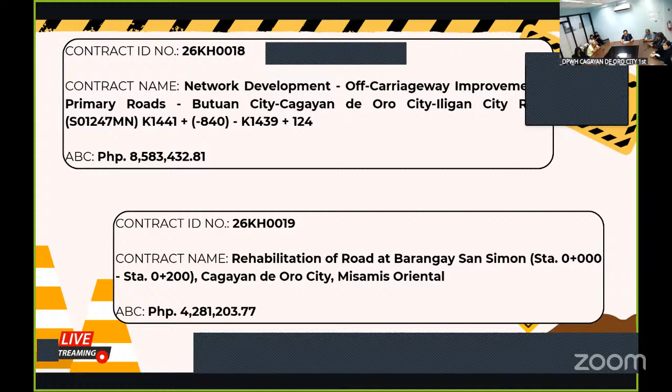Second project, we have 26KH0019. This is the rehabilitation of road at Barangay San Simon, Cagayan de Oro City, with an approved budget for contract of 4,281,203 pesos and 77 centavos.

Third project, 26KH0020, with contract name rehabilitation of road at Barangay Tagpangi, Cagayan de Oro City, Misamis Oriental, with an approved budget for contract of 4,381,792 pesos and 90 centavos.

And the last one is 26KH0021, with the contract name rehabilitation of road at Barangay Tignapoloan, Cagayan de Oro City, Misamis Oriental, with an approved budget for contract of 4,289,341 pesos and 56 centavos.

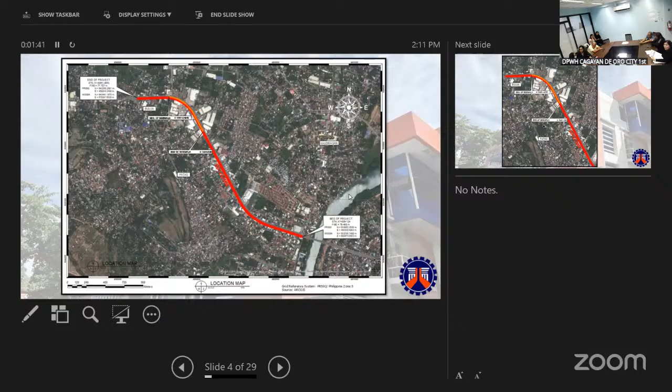So this is the whole stretch of the CIR, the orange part. So we can see the beginning of the sidewalk, the location of our project, and the end, also indicated in the image.

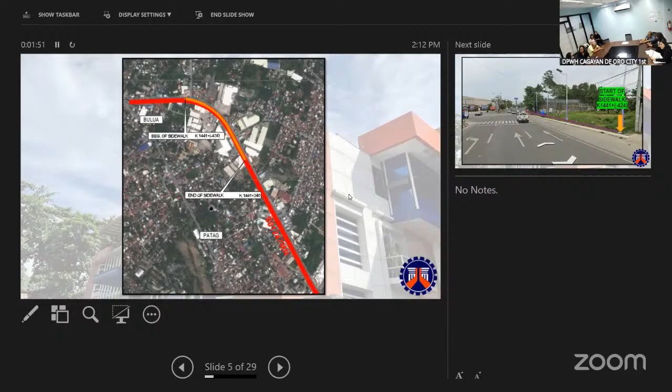So the start of our project will be located at the crossing to Butuan Terminal. As stated in the image, the start of our sidewalk is at K 1441 plus minus 424.

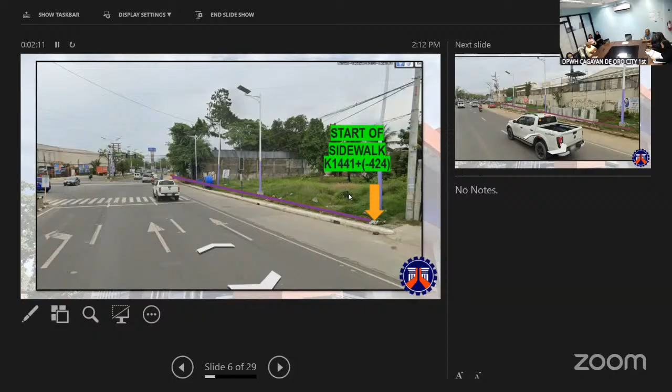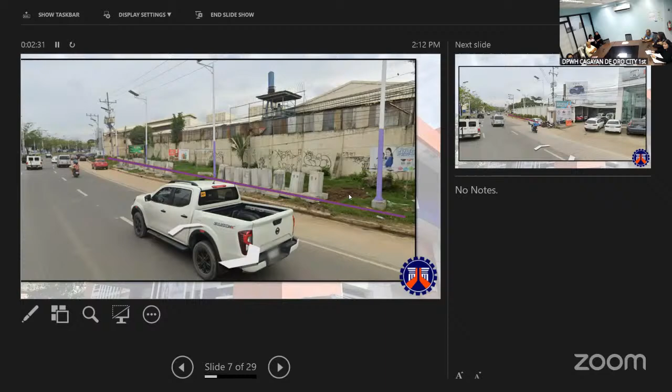So we'll follow along the right side, the sidewalk area, so we'll develop this. We will remove the existing curb and replace it to improve the sidewalk, and follow along. So here we will provide a transition in between the commercial areas or around.

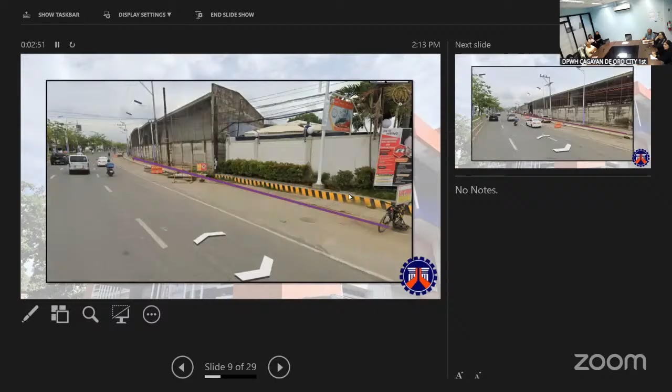Continuing from the RTM, from the Honda to RTMI, to the Gaisano warehouse until the quick drive area. The end of our project is at K1441 plus 240.

Based on the plan, we'll remove the actual structures and obstructions like the existing curb, and replace it with a concrete curb plus complete paving blocks, 0.10 meter by 0.2 by 60mm interlocking complete paver blocks to improve our sidewalk.

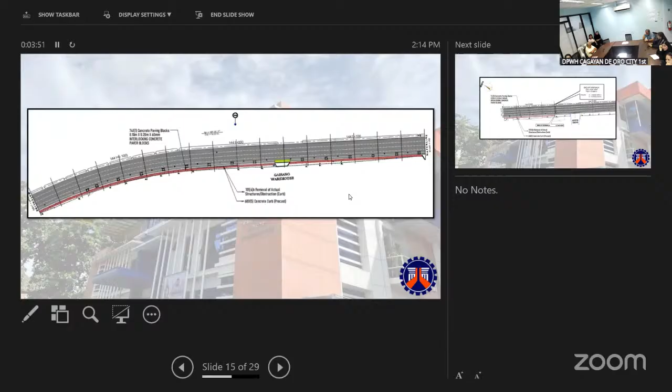The red indicated areas are the sidewalk areas. The void spaces are the commercial areas, which are the entrance to RTMI and also the entrance to the Gaisano warehouse. Continuing, we can see the end of our sidewalk at K1441 plus 240, near the quick drive crossing.

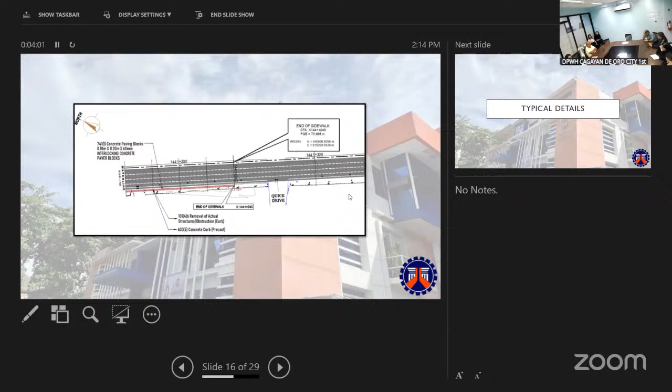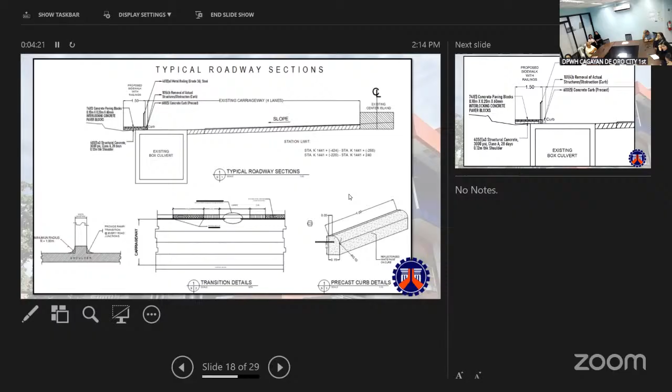For the typical details of our project, we have an existing box culvert. Our sidewalk will lay above it, so we will only develop the sidewalk. We can see here the details.

We remove the existing curb and replace it with a new concrete curb. We will have a metal railing, details to be shown later, and also structural concrete.

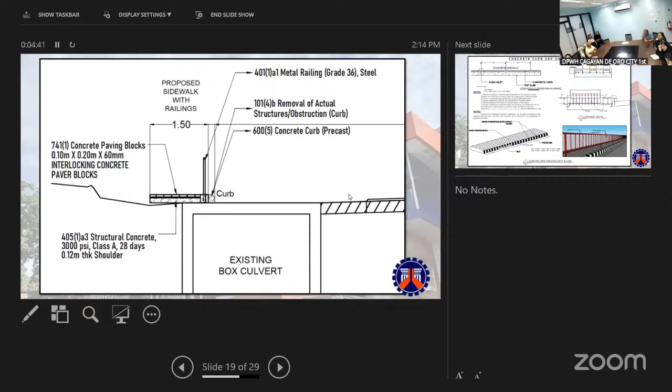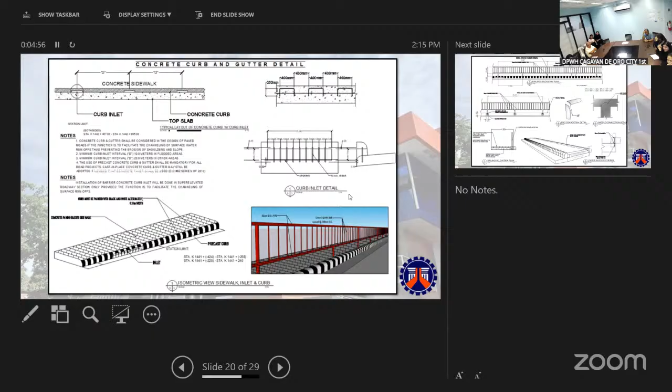So if we view the details of our curbs and sidewalk, here are the details of our railing elevation plans and also the end connection of our railings. The vertical poles of our railings will be spaced at 5 meters.

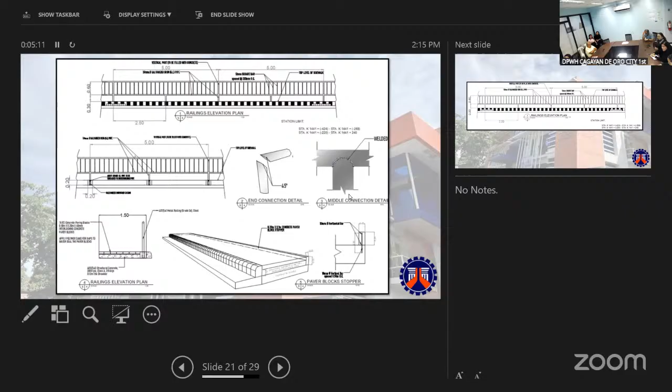Here you can see we have 12mm square bars spaced at 200mm OC. We will also have a 50mm diameter galvanized iron GI pipe as the main members.

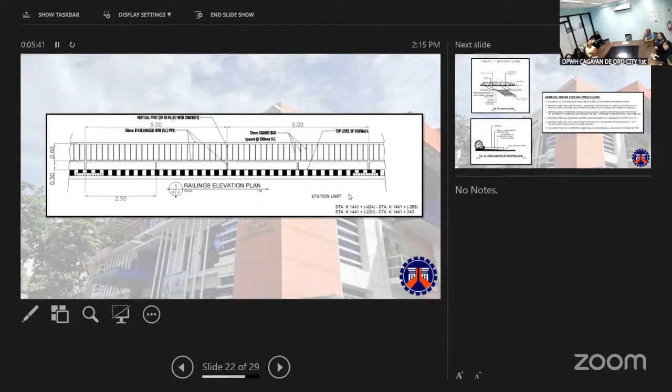And also the details for our drop curbs, especially at crossings and in transitioning to commercial areas.

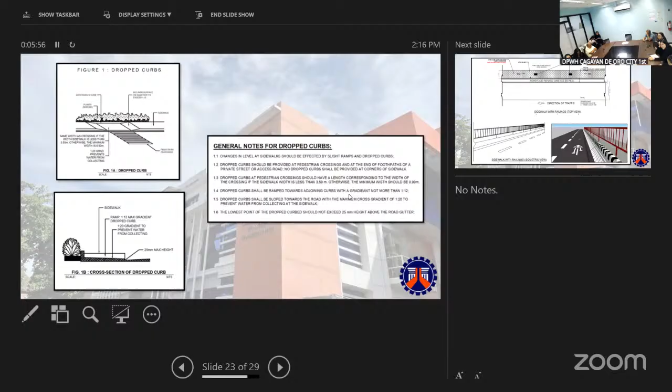Correction for the approved budget for contract: the final quantity for the approved budget for contract is 8,583,432.81 pesos.

Continuing, we have the perspective view of our sidewalk and steel railings. The existing steel grating on the sidewalk must be elevated to match the new elevation of our sidewalk.

For our summary quantities: Unit 5, the project billboard, signboard, four each. Unit 7, occupational safety and health program, 1 lump sum. Unit 8, traffic management, 1 lump sum. Unit 9, mobilization/demobilization, 1 lump sum.

For our earthworks, we have 101-3D, removal of actual structures and obstruction of 0.10 thick sidewalk with 888 square meters. This is located near the Gaisano area, the Gaisano warehouse area, where we have an existing sidewalk.

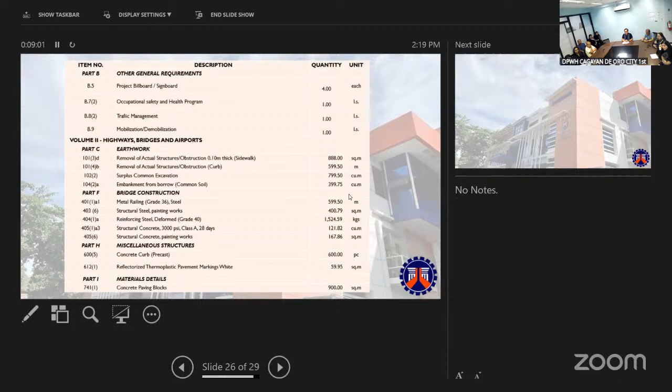Welding machine, electric driven, with DC output of 500 amperes, 1 owned; grinding machine and accessories, 1 owned; bar cutter with 25mm maximum rebar, 1 owned; bar bender, 1 owned; applicator machine and kneading machine, 1 owned for our thermoplastic; 2-way radio for our traffic management, 2 owned; barricade flasher lights, 29 owned; and material testing apparatus, 1 owned.

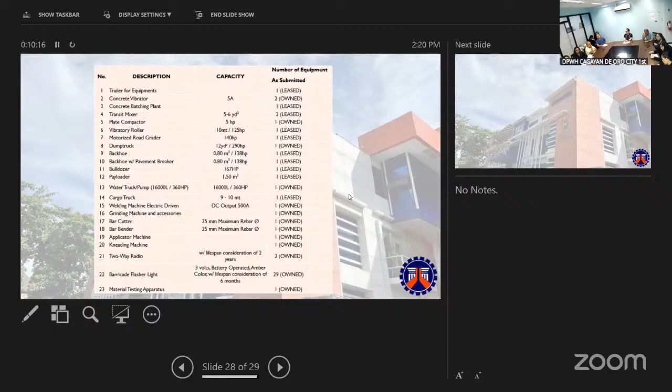So that's all for the contract ID 26 K001.

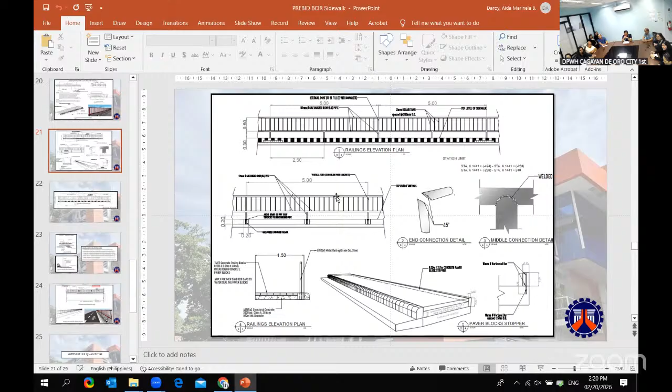Okay, let us proceed with the second project.

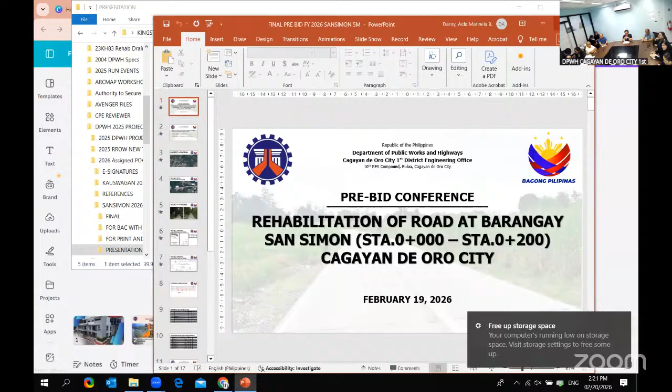So, the project rehabilitation of road at Barangay San Simon, 26KH0019. This will be discussed by Engineer Morales.

Good afternoon, everyone. Today I will be presenting the project rehabilitation of road at Barangay San Simon Station 0+00 to Station 0+200, Cagayan de Oro City. For the contract ID 26KH0019, contract name is rehabilitation of road at Barangay San Simon Station 0+00 to Station 0+200, Cagayan de Oro City, with contract duration of 77 calendar days.

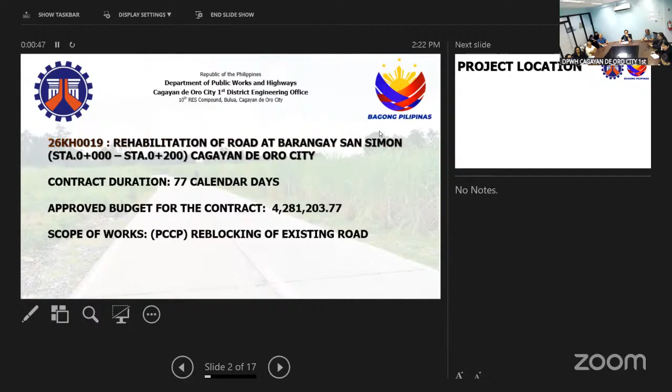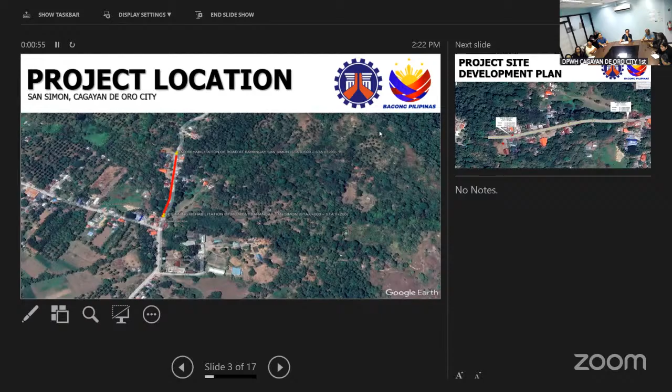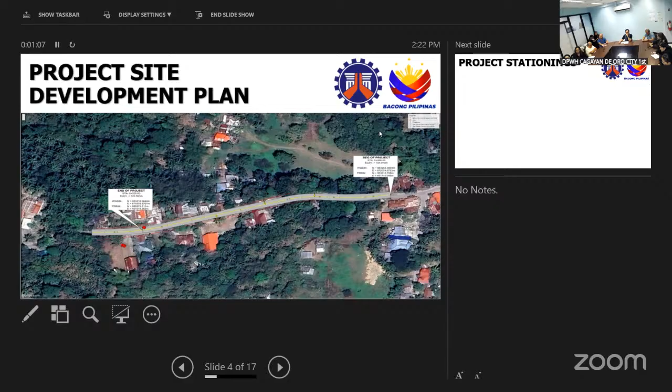The approved budget for the contract is 4,281,203.77 pesos. The scope of works for the rehabilitation of the project is specifically the reblocking of existing road. So for the project location, the rehabilitation of San Simon is located along the San Simon Baptist Church, as you can see in the slides. The project starts along the San Simon Baptist Church with 200-meter length.

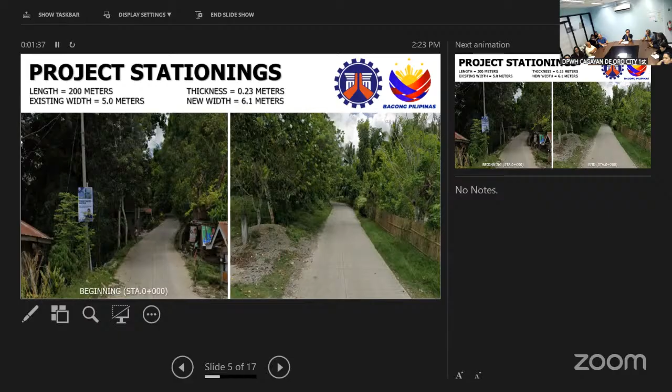For the project stationings, the length of the project is 200 meters. The existing width is 5 meters, and the rehabilitation of the existing road will be 6.1 meters with thickness 0.23 meters. So this is the beginning station of the project and the end station of the project.

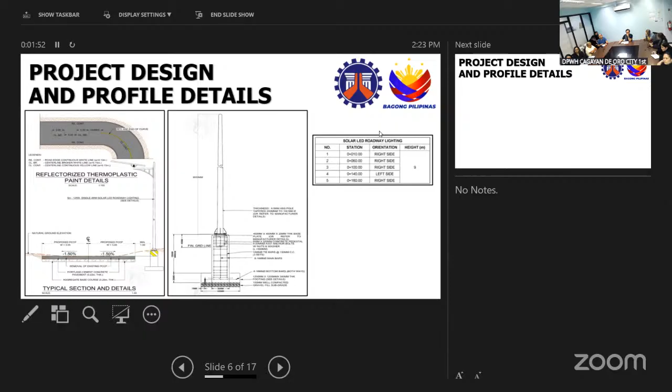For the project design and project details, the rehabilitation of road at Barangay San Simon includes project items including reflectorized thermoplastic paint. Also, for the typical section of the rehabilitation of road, the new width will be 6.1 meters. It will include removal of existing PCCP, Portland cement concrete pavement, with 0.23 thickness and aggregate base course of 0.20 thickness. The project will also include 5 solar LED roadway lighting, specified in the slide, with specific stationings at 0+010, 0+060, 0+100, 0+140, and lastly 0+180.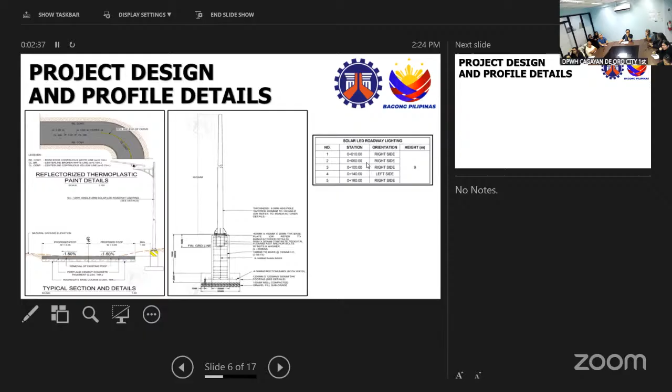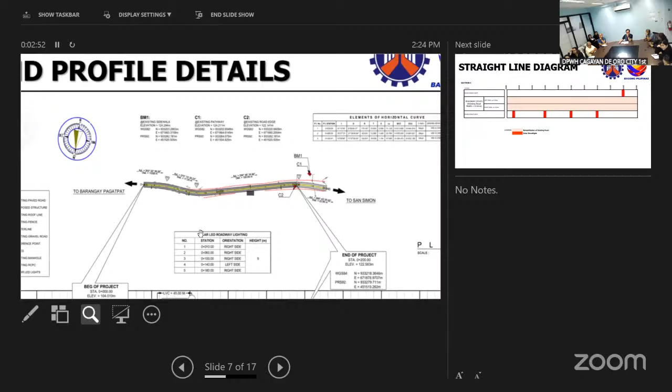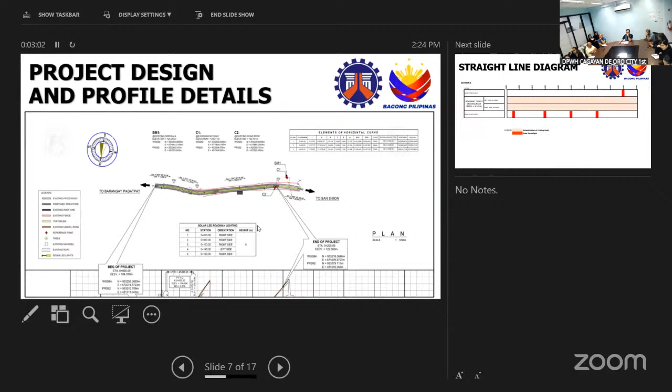For the project design and profile details, as mentioned, there will be 5 solar streetlights included in the project. The existing 5 meters will be replaced to 6.1 meters with 0.23 meters thickness. So for the straight line diagram, as mentioned earlier, the left side and the right side respectively will have 3.05 meters in width, with solar streetlights both in left and right side of the road.

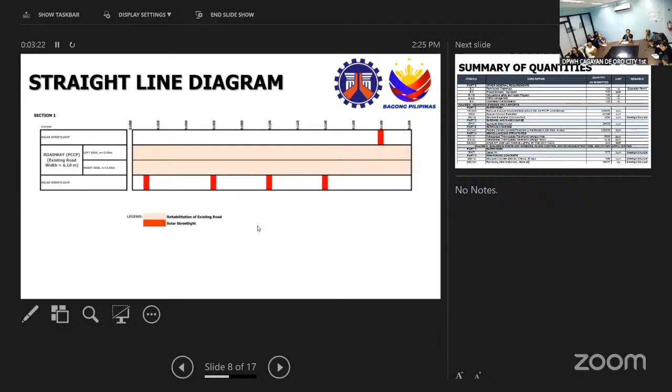For the summary of quantities, permits and clearances, 1 lump sum for excavation permit. Project billboard and signboard, 4 each. Occupational safety and health program, 1 lump sum. Traffic management, 1 lump sum. Mobilization and demobilization, 1 lump sum. For earthwork, removal of actual structures and obstruction of 0.23 meters thickness, 1,000 square meters. Surplus common excavation, 433.96 cubic meters. For structure excavation, common soil, 10.80 cubic meters, which is for the streetlight structure.

For the sub-base and base course, aggregate base course with 244 cubic meters. For surface courses, Portland cement concrete pavement with 0.23 meters thickness of 1,220 square meters. For our miscellaneous structures, the project will include reflectorized thermoplastic pavement markings white with 48.55 square meters. Reflectorized thermoplastic pavement markings yellow, 14.19 square meters. And lastly, the single arm solar roadway lighting with 9 meters in height, 5 each.

For earthwork, gravel fill will have 0.72 cubic meters used for the streetlight structure. For the reinforced concrete, it will include structural concrete 4,000 PSI Class A with 3.66 cubic meters for our streetlight structure. And lastly, reinforcing steel grade 40 with 258.57 kilograms for our streetlight structure.

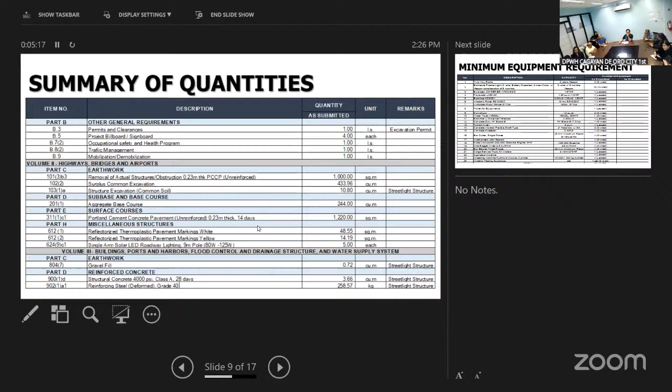Moving forward with our minimum equipment requirement: two-way radio, 2 owned; barricade flasher light, 10 owned; bulldozer, 1 leased; payloader, 1 leased; backhoe, 1 leased; vibratory roller, 1 leased; motorized road grader, 1 leased; dump truck, 2 owned; water truck, 1 owned; backhoe with pavement breaker, 1 leased; concrete saw, 1 owned; transit mixer, 1 leased.

Concrete vibrator flexible shaft type, 2 owned; concrete screeder, 2 owned; bar cutter, single phase, 1 owned; mechanized joint sealant, 1 owned; plate compactor, 1 leased; 1 bagger mixer, 1 owned; bar bender, 3 phase, 1 owned; cargo service truck, all models, 1 leased; applicator machine, 1 leased; kneading machine, hydraulic double cylinder, 1 leased; and lastly, material testing apparatus, 1 leased or owned.

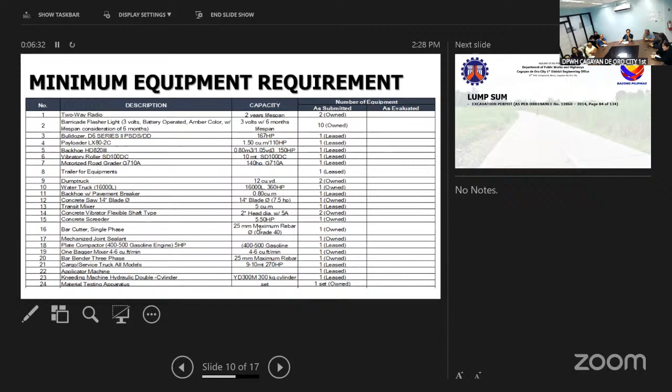For other requirements, lump sum to be used for excavation permit as per the ordinance number 13860-2014, page 84 of 134. For road right of way, the project has secured permit granted and barangay resolution. It has also coordinated with the barangay council and residents, and it has ensured no private property encroachment. So the following are the road right of way requirements, including the site validation forms and permit to enter. Thank you so much, and that is all.

Okay, thank you. Again, we have questions from our respective leaders. And then for the viewers.

So we proceed to the third subject, which is the rehabilitation of road at Barangay Tagpangi, Cagayan de Oro City, 26PH0020. This will be discussed by Engineer Jeff Ken.

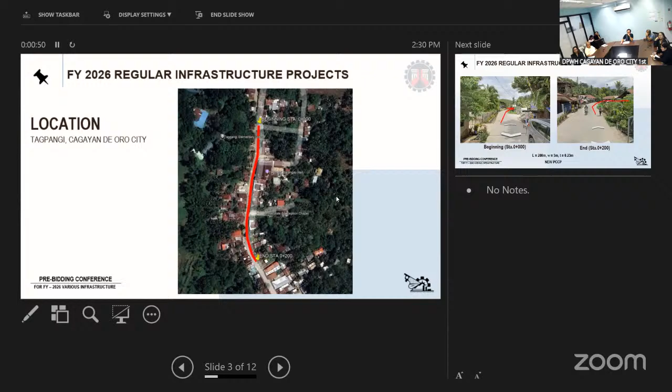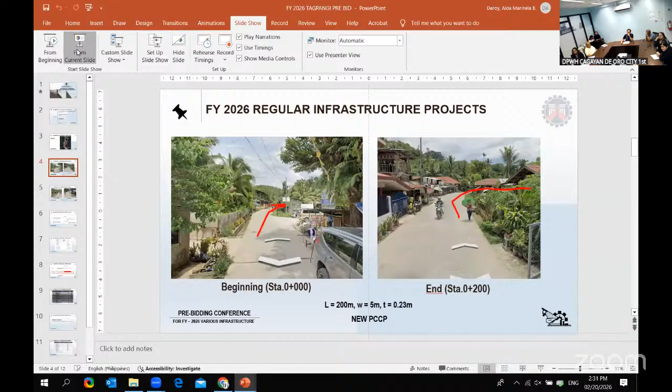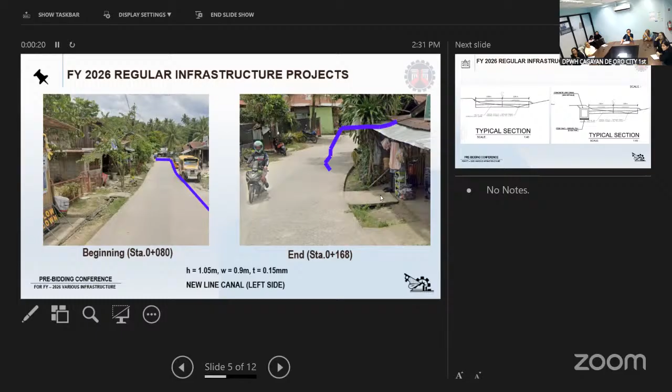The scope of work includes reblocking of 200 meters length with a width of 5 meters and thickness of 0.23 meters of new Portland cement concrete pavement or PCCP. As you can see in this image, the starting project is before the stores, and the end is here in the blue gate. Then the construction of new lined canal on the left side from station 0+080 and the end station is 0+168. These are the typical sections of the new road PCCP with the new concrete lined canal.

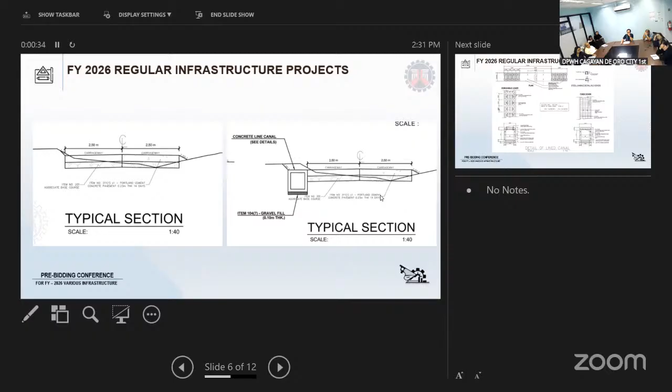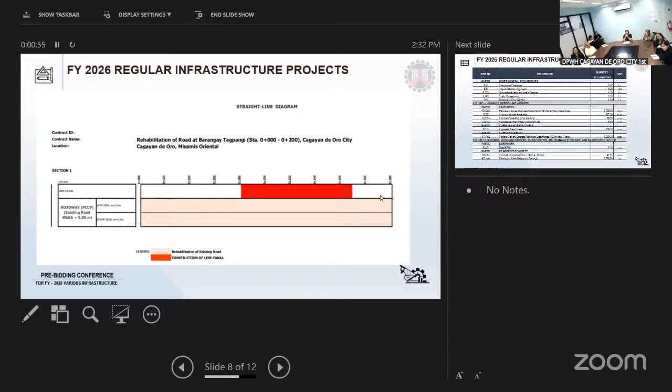And these are the structural details of the lined canal. And we have the straight line diagram, as you can see, with the rehabilitation of existing road and the construction of lined canal. And these are the summary of quantities.

In Part B, other general requirements, we have permits and clearances, one lump sum; project billboard or signboard, four each; occupational safety and health program, one lump sum; traffic management, one lump sum; mobilization or demobilization, one lump sum. Volume 2, highways, bridges, and airports.

In Part C, earthwork, we have removal of actual structures, obstruction, 0.23 meter thick PCCP, unreinforced, 1,000 square meters; surplus common excavation, 407.1 cubic meters; structure excavation, common soil, 85.05 cubic meters; embankment from borrow, common soil, 8.3 cubic meters. In Part D, subbase and base course, aggregate base course, 200 cubic meters. Then in Part E, surface courses, we have Portland cement concrete pavement, unreinforced, 0.23 meter thick, 7 days, 1,000 square meters.

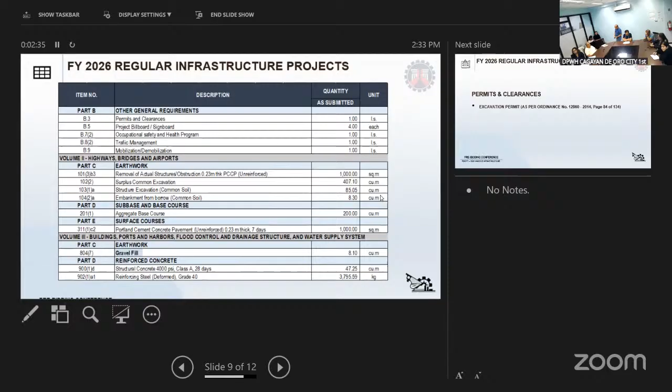And Volume 3, buildings, ports and harbors, flood control and drainage structures, and water supply systems. Part C, earthwork, we have gravel fill, 8.1 cubic meters. In reinforced concrete, we have structural concrete, 4,000 PSI, class A, 28 days, 47.25 cubic meters. Reinforcing steel, deformed, 3,795.59 kilograms. And in permits and clearances, we have the excavation permit as per Ordinance Number 12860, 2014, page 84 of 134.

And this is for the equipment to be used. Trailer for equipment, 1 leased. Concrete vibrator, 2 owned. Concrete screeder, 1 owned. Concrete saw, 14-inch blade, 1 owned. Mechanized joint sealer, 1 owned. Plate compactor, 1 leased. Vibratory roller, 1 leased. Motorized road grader, 1 leased. Dump truck, 2 leased. Backhoe, 1 leased. Water truck or pump, 1 leased.

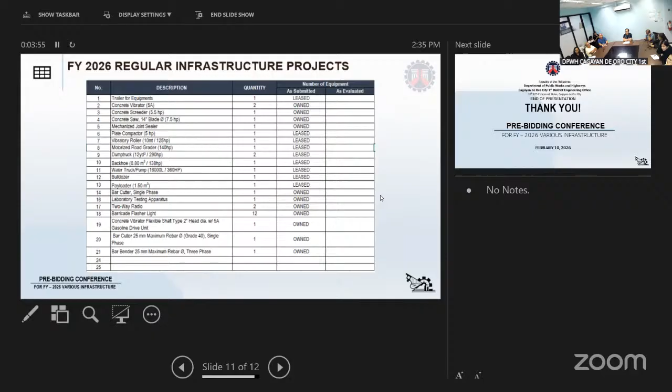Bulldozer, 1 leased. Payloader, 1 leased. Bar cutter, single phase, 1 owned. Laboratory testing apparatus, 1 owned. Two-way radio, 2 owned. Barricade flasher light, 12 owned. Concrete vibrator, flexible shaft type, 1 owned. Bar cutter, 25 millimeter maximum rebar, 1 owned. Bar bender, 25 millimeter maximum rebar, 3 phase, 1 owned. And this is the end of my presentation.

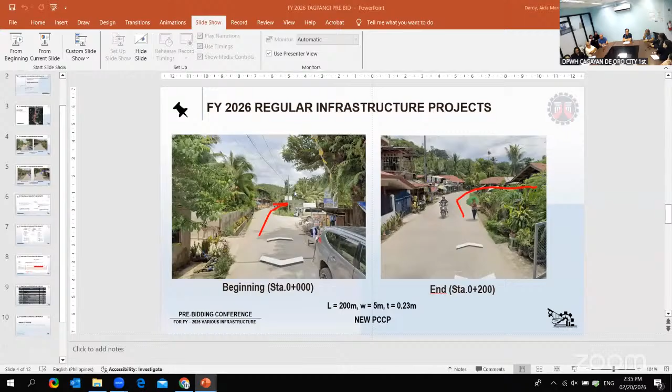Okay, thank you, Engineer Jeff. So, are there any questions or clarifications? Yes. From the viewers? None, sir. So, let's proceed to the last project. It's 26/00/21, the rehabilitation of road at Barangay Tignapoloan, Cagayan de Oro City. This will be discussed by Engineer Atis.

So, good afternoon, everyone. Rehabilitation of road at Barangay Tignapoloan, Station 0 to Station 200, Cagayan de Oro City, Misamis Oriental. So, the approved budget for the contract is 4,289,341.56, with a project duration of 65 calendar days. And the scope of work is rehabilitation of existing paved road, PCCP 3.05 meters both sides with thickness of 0.2 meters, and construction of open lined canal drainage.

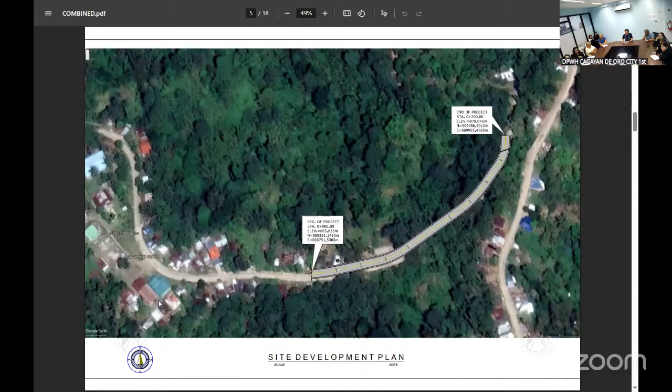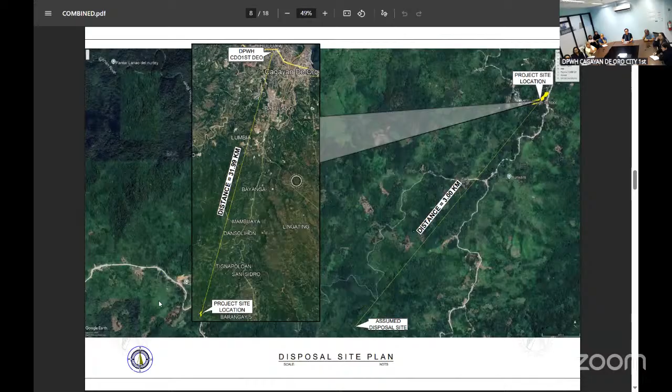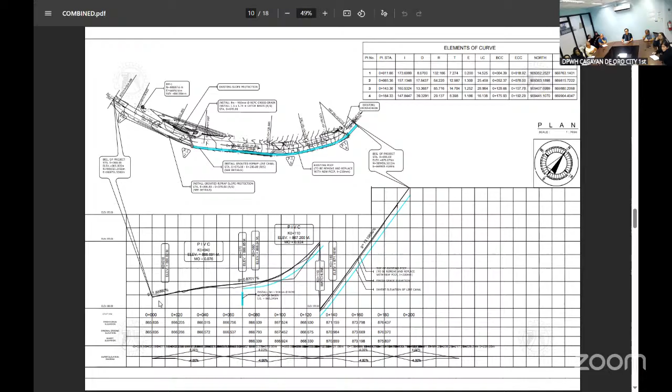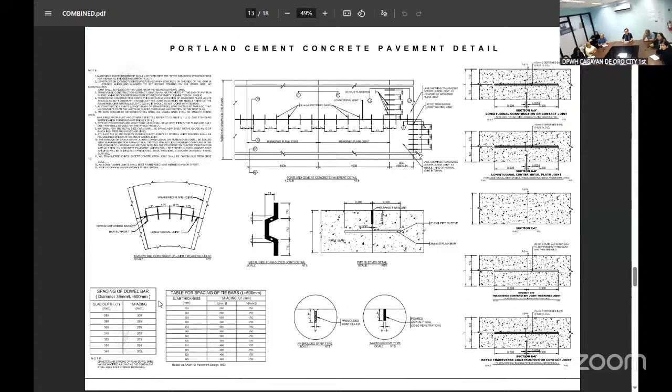So for typical drawings, these are the details. We also have here construction of slope protection, riprap. The maximum height of slope protection is just 1 meter, so that's why the designer opted for riprap. There's also construction of a cross drain alongside the lined canal. So these are the details for the PCCP and the geometric design standard drawings. Details for the reblocking.

So for the summary of quantities, we have permits and clearances, 1 lump sum; project billboard and signboard, four each; occupational safety and health program, 1 lump sum; traffic management, 1 lump sum; mobilization, demobilization, 1 lump sum; removal of actual structures, obstruction, 0.23 meters thick, 1,220 square meters; surplus common excavation, 618.21 cubic meters; structure excavation, common soil, 23.3 cubic meters; embankment from roadway structure excavation, common soil, 48.65 cubic meters; aggregate base course, 183 cubic meters; Portland cement concrete pavement, unreinforced, 0.2 meters thick, 14 days, 1,220 square meters.

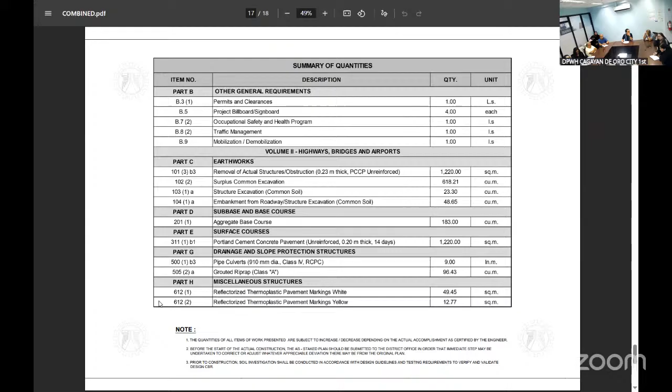Pipe culverts, 910 millimeter diameter, class 4, RCPC, 9 linear meters; and grouted riprap, class A, 96.43 cubic meters. Reflectorized thermoplastic pavement marking, white, 49.45 square meters, and reflectorized thermoplastic pavement marking, yellow, 12.77 square meters. So for the minimum equipment required, we have backhoe, one leased, so we will be updating this in the meeting.

So backhoe, one leased; dump truck, two leased; bulldozer, one leased; payloader, one leased; motorized road grader, one leased; vibratory roller, one leased; water truck pump, one owned; plate compactor, one owned; transit mixer, four leased; concrete vibrator, two owned; concrete batch plant, one leased; concrete screeder, one owned; concrete saw, one owned; bar cutter, single phase, one owned;

joint sealer machine, one leased; one bagger mixer, one owned; cargo service truck, 2 to 5 metric ton, one leased; backhoe with pavement breaker, one leased; applicator machine, one leased; kneading machine, one leased; material testing apparatus, one owned; two-way radio, two owned; barricade flasher light, 12 owned. So again, this will be posted to the weekly remarks.

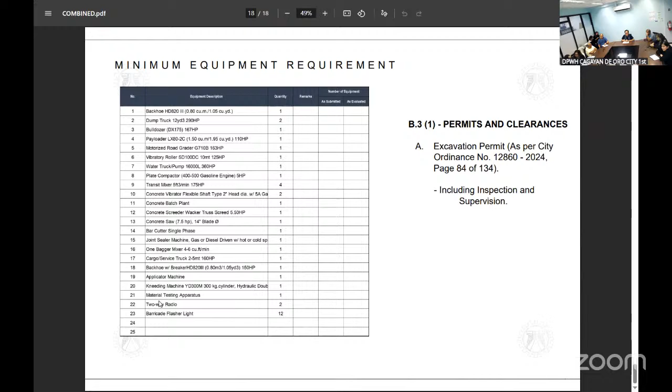So for permits and clearances, there's also an inclusion for the excavation permit as per City Ordinance number 12860-2024, page 84 of 134, and this including inspection and supervision. So that's all for this presentation. Okay, are there any questions? Clarifications?

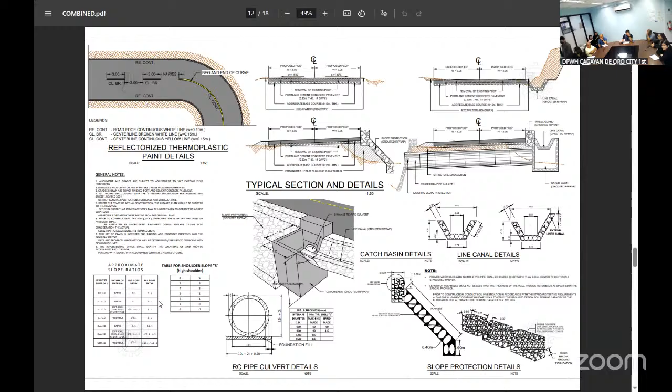Thank you, Engineer Aris Alonso, and at this point, let's proceed to the instruction procedures, which will be discussed by Engineer of the procurement unit. Good afternoon, Mr. Chair. Good afternoon, everyone. I will be discussing the procurement permits and procedure for these infrastructure projects.

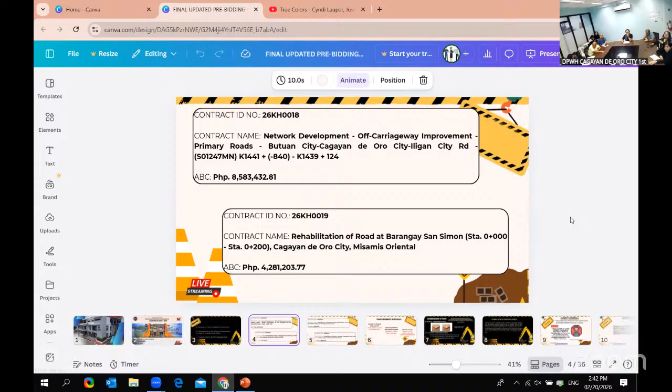Okay, so here we have the infrastructure projects with the corresponding contract IDs and approved budget for the contract. Next, for the procurement schedule, the buying of tender documents is until March 4, 2026 at 9:30 AM only. The deadline for the submission of bids will be on March 4, 2026 until 10 AM. And the opening of bids will follow right after the deadline for the submission of bids.

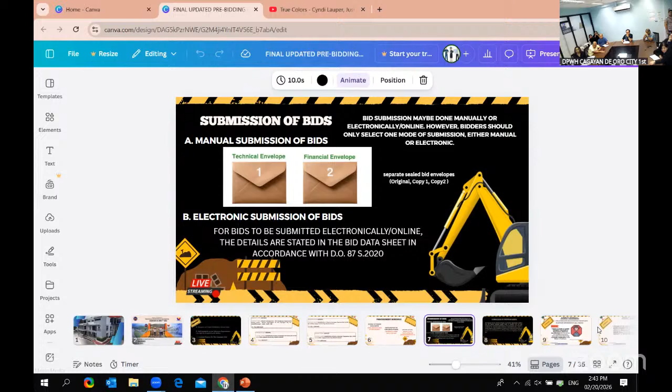For the submission of bids, it may be done manually or electronically. However, bidders should only select one mode of submission, either manual or electronic. So for the manual submission, we have the two-envelope system, wherein the first envelope has the technical components of the bids, and the second envelope will contain the financial component of the bids. The bids must have an original, a copy 1 and a copy 2. For the electronic submission, the details are stated in the data sheet.

The proposals may be submitted through an authorized representative together with the original special power of attorney for sole proprietorship, or board resolution, partnership or joint venture resolution with secretary's certificate for corporation, partnership, joint venture or cooperative, which is contract specific, accompanied by a company ID or any government issued ID, to ensure the representative is an official member and to prevent fraudulent actions such as unauthorized use of another contractor's eligibility for personal use.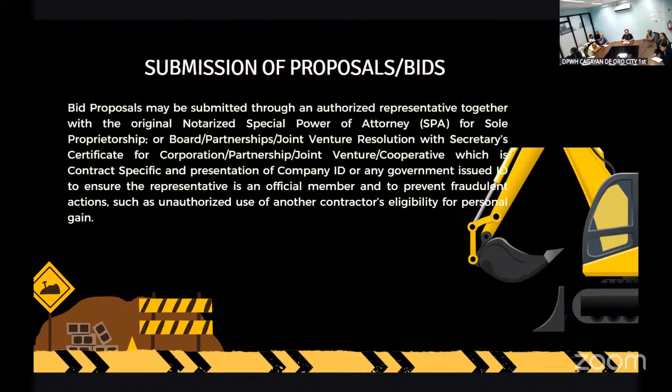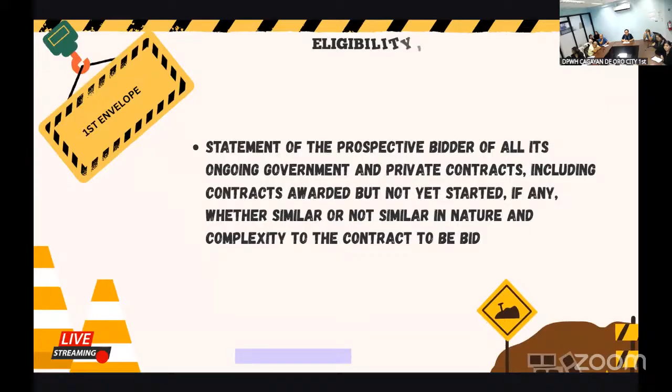Next, for the first envelope, the bidder must provide the valid and updated registration certificate and platinum membership. Failure of bidder to update the registration certificate shall result in an automatic suspension of the bidder's certificate. Next, the bidder must provide a statement of all its ongoing government and private contracts, including contracts awarded but not yet started. Next, the bidder must provide a statement of the single largest completed contract or the SLCC. Next, they must provide a PCAB license or special PCAB license for joint venture.

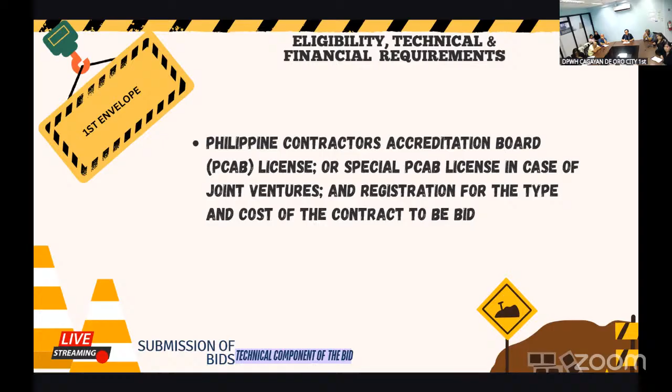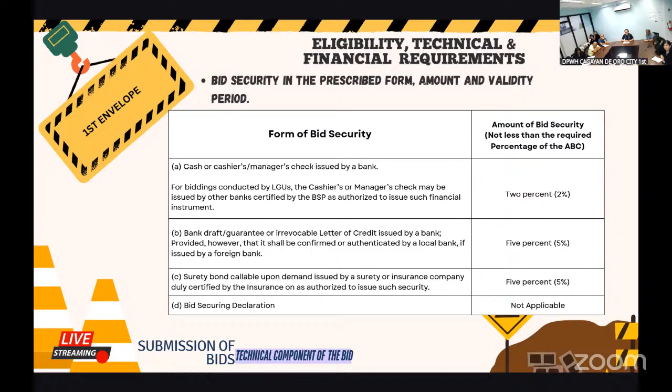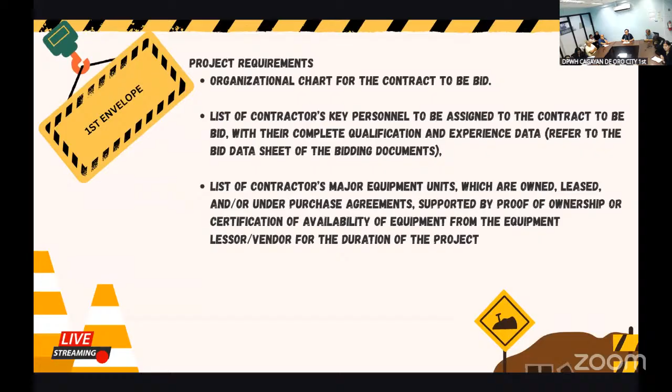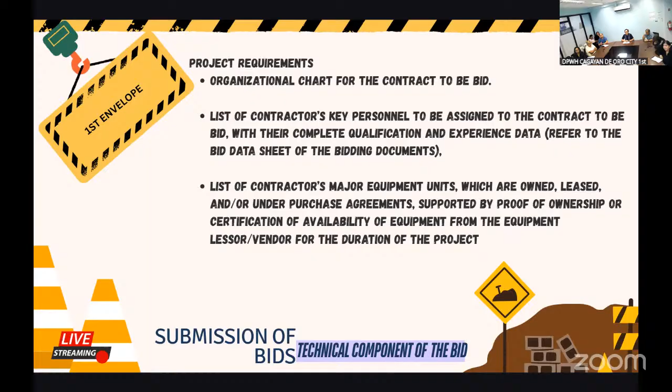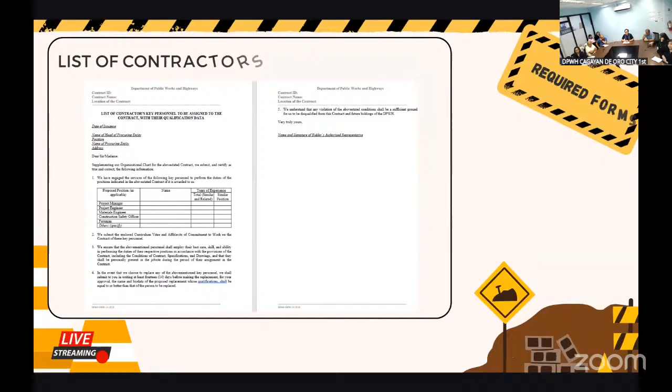Next, for the project requirements, the bidder must provide an organizational chart for the contract, the list of contractor's personnel, and the list of contractor's equipment units. Please see the attached bidding documents for the required years of experience for the key personnel, the required number of units, and the capacity for the major equipment. These are the standard forms for the following: the organizational chart, the list of contractor's key personnel, and the list of contractor's major equipment units.

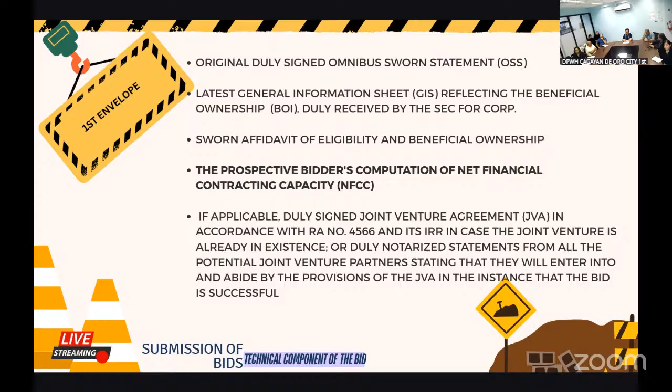Next, they must provide an original duly signed omnibus sworn statement, the latest general information sheet reflecting the beneficial ownership, duly received by the SEC for corporations. Next is the sworn affidavit of eligibility and beneficial ownership. Next, they must provide an NFCC, the net financial contracting capacity, and a joint venture agreement in case of joint venture. These are the standard forms for the omnibus sworn statement. These are the standard forms for the sworn affidavit of eligibility and beneficial ownership.

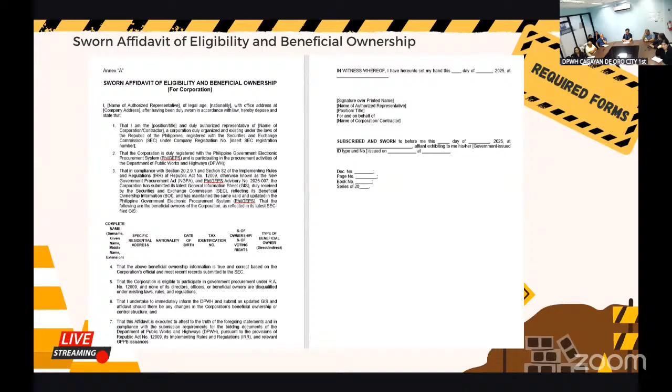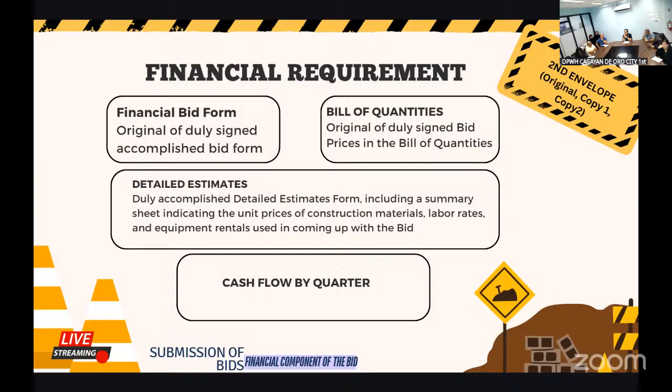Next, for the second envelope, which contains the financial component of the bid, the bidder must provide the financial bid form, the bill of quantities, the detailed estimates, and the cash flow by quarter, which are duly signed. And these are the standard forms for the bid form, the bill of quantities, the detailed estimates, and the cash flow by quarter.

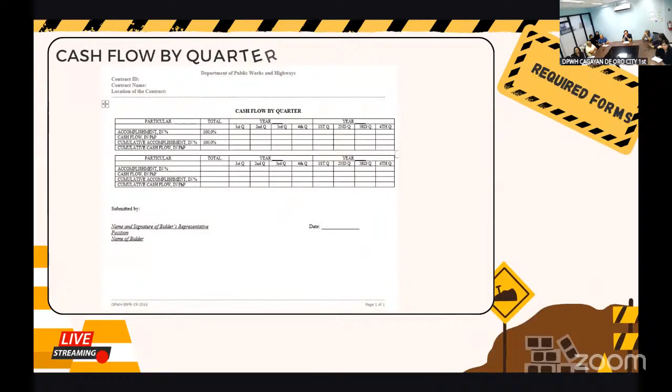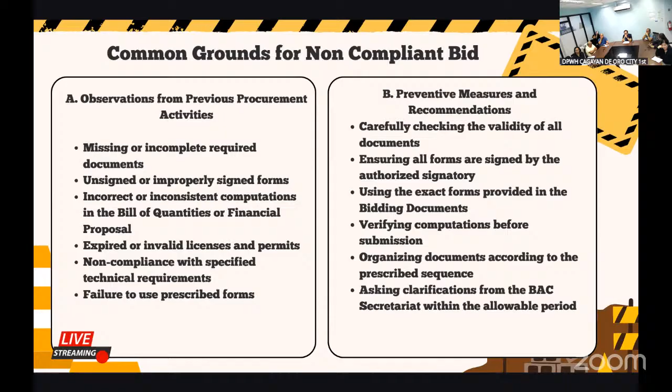Next, we have these common grounds for a non-compliant bid. We have the observations from the previous procurement activities and the preventive measures and recommendations. Thank you, Chairman. Do you have any clarifications, our prospective bidders?

Since there are no more matters that need to be discussed, therefore this pre-bid conference comes to an end.